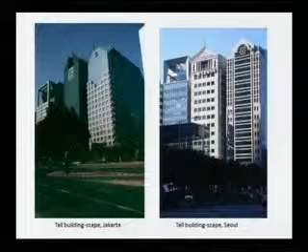It's the same. This is a cityscape in Jakarta, and another in Seoul—just two places I visited. It's the same rectilinear air-conditioned box isolated from culture, with a bit of fun and games at the top, and sometimes a bit of fun and games at the bottom. I mean, look at this—look at the slide of Seoul, the scheme in the middle there, with a postmodern, neoclassical pediment.

What the hell's that doing in the middle of South Korea? If it was in Rome, we could at least understand there's a cultural link—not a very deep one, but there's a link. But what is it doing there? Where is the cultural link with this? I'll tell you what the link is, and you're probably all aware: the link is Western equals modern, so let's emulate Western, let's import it—whether it's a car, a building, or whatever. I feel very strongly that we need to react against this.

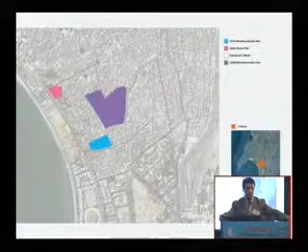You saw the maps from some of the presenters earlier today. The red is the C Ward. The purple is the 5 sites that we chose for the students last year. Interestingly, the blue is the site that we're doing this year, so I have 12 students in the room who are doing a similar project this year. And interestingly, the pink is the site for the India Tower, which I think a lot of you will know. So although this is not a high-rise context, as you've seen from Mayank and others, the plan is that this will be a high-rise context.

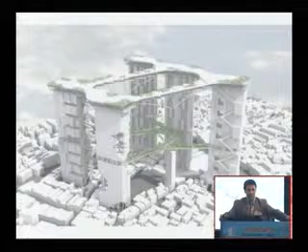Wow. That's what we created. Is it a monster? Perhaps. But I want to talk to you about the ideas behind this. I jumped to the final image so you know where we're going - let's not keep it in suspense. But it's really important that you understand the ideas here.

I mentioned yesterday, in fact, Charles Correa spoke about it - you know, for correct tall buildings, it's not about FSI, it's not about number of meters, it's about what makes sense in support facilities, amenities. I'm the Executive Director of the Council on Tall Buildings and Urban Habitat, and I live out in a single-family home in a place called Oak Park on the edge of Chicago, with a nice garden.

I have 2 children, 3 and 6 years old. I would not put them in a high-rise tower if you paid me. Because there is not the space and facilities in the majority of high-rise buildings to continue the pattern of life that we want - social space, communal space. This happens at the street, in the gardens, in the parks, in the road. It doesn't happen in elevators and corridors.

If we are serious about creating future, taller, denser cities, then we need to put all of the city up in the sky. And this is what this project looked to do.

So bear with me for a second while I talk about sky bridges - connections between buildings. It's been proposed for almost 200 years in science fiction, cinematography, and various other realms. Is it just a utopian vision? I know of at least 50 buildings around the world that have sky bridges, connections between buildings.

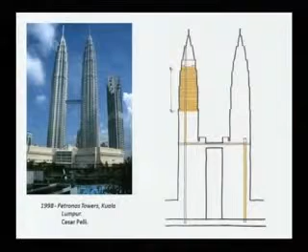There are lots of other benefits. You know the Petronas Towers? That sky bridge is part of the fire strategy, fire evacuation strategy. So people can actually evacuate through the sky bridge and evacuate through the safe tower in the event of a fire.

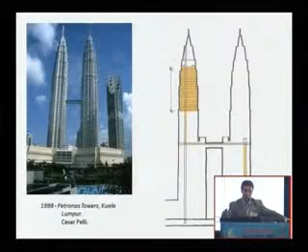That actually resulted in them being able to omit 1 fire stair from each of those towers - 1 fire stair, 3 meters by 6 meters, 18 square meters per floor, times 2 towers, times 44 stories, because it was half height. That's a lot of money, as well as floor saving.

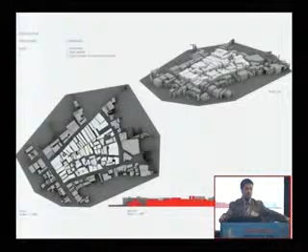Mayank just gave what I thought was an excellent presentation. I've spent a lot of time with Mayank in the past year, and he's an incredibly intelligent and sincere guy. I think we agree on most things, virtually 95%. Personally, I agree with everything they've said in the C Ward, with the exception of the final vision.

Because what concerns me is they're sweeping the city away. Where they see just problems in the C Ward, I see an area that I've never seen anywhere on this planet, fraught with problems, no question about it, but also full of opportunities. And go back to what I said before: it's been done around the world, sweep away the city and build something new. I think there is a way we can work with the existing fabric.

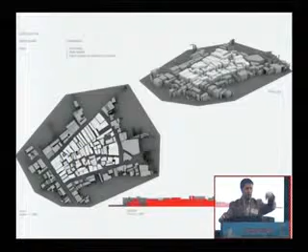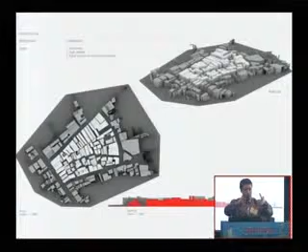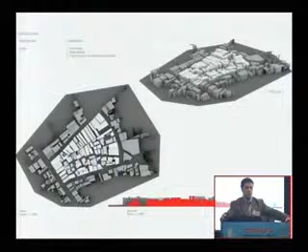Not just retain the religious structures and listed structures, but actually, if need be, look to recreate the urban grain that is there. Widen some of the roads, but the C Ward is the C Ward, and Mumbai is the C Ward because of the nature of the street and the buildings that front the street and the activities in those buildings. Personally, I don't think you should sweep all that away. So we did a number of generic studies to show how we could keep that and still develop a tall building and still put in some car parking. I'm not going to go through it in detail, but you can perhaps get an idea through some of these.

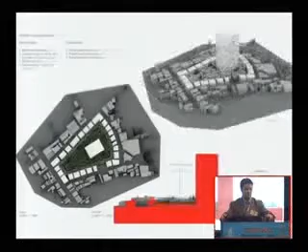Every scheme is retaining the perimeter of the site, or at least the concept of the perimeter of the site. Okay, so this is interesting.

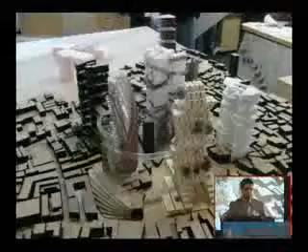So we did all this, we got back to Chicago, and then it was, right guys, you're all ready to design your tall building, get on with it. And look what they created. I think this epitomizes what's kind of wrong with architecture. Each student went out and designed their own high-rise icon and created a zoo, an architectural zoo, a menagerie, when even the brief required a vision together, and it did not have that vision.

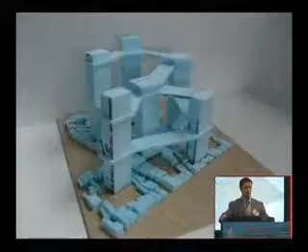So we stepped back from that. We started to develop a common architectural framework, started to explore how these buildings could relate to each other, and you can see a development here.

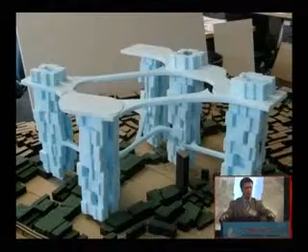Eventually to this, and this was an interesting breakthrough. In this scheme, we started to look at the relationship between the towers, at the base, at the urban grain, but also slipping past each other for views and wind and access to other things.

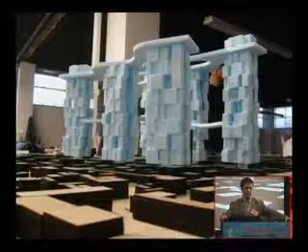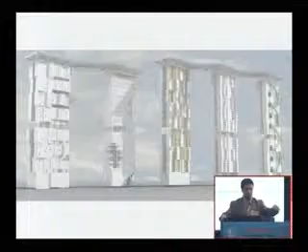This is the final model, but I want to talk a little bit about agenda. So there were 5 towers. Each of these 5 towers had an agenda. Most of them were sensible residential towers, but had these additional agendas.

This one was about food. The students researched how, as the city intensifies and gets bigger, we rely on ever more agricultural land to support our existence in cities. Not only that, but we import food, and the consequential food miles and energy involved from all around the world. They did a study which showed that a cabbage comes from Pune, 119 miles away, but an apple comes from the USA, 19,000 miles away. So there are energy implications and loss of agricultural land.

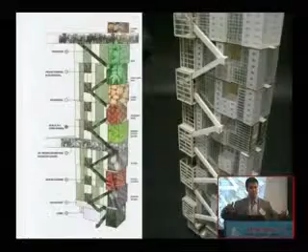So they looked at hydroponics - it's been done around the world. You don't want soil in tall buildings, so hydroponics means growing vegetables in the building. This became a sensible residential building, but the people who live there actually have access to a high-rise allotment, a place to grow vegetables, not only to sustain themselves but actually as a business to sell back to the city. That was one layer.

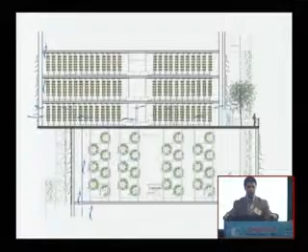You can see at the bottom end here, this was the vertical farm element, which was broken into horizons - fish farming, various other things up there. And in addition to that, we had these gardens, these communal spaces up in the air, and this public green elevator.

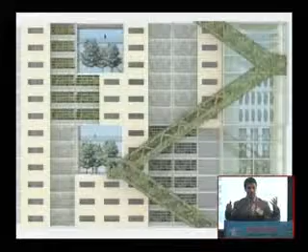You're going to hear Ken Yeang talk tomorrow about his work. A lot of Ken Yeang's work is about continual greenery, eco-corridors that have taken people up to this great park in the sky.

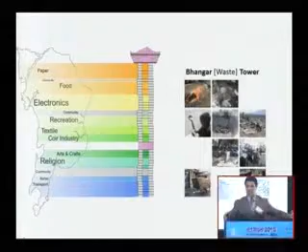Second scheme. Some of the students really engaged with the issue of waste in Mumbai, a major problem. Waste in a large part of the city is just thrown out of the window. However, there's a whole industry built up around it - we were in Dharavi slum the other day, and there's a whole section of Dharavi concentrated on recycling of materials. There is an industry that has grown up around it.

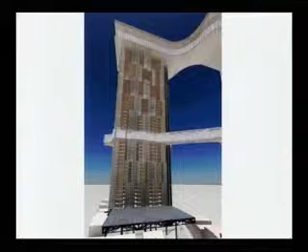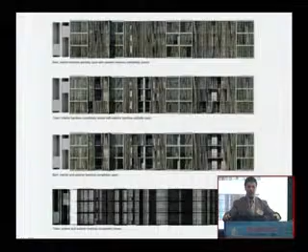So these students did lots of studies and looked to incorporate that waste into their building. In the same way that we had the vertical farm community for the residents, here we had a kind of recycling waste center within not only that building, but the whole complex that was created. Using some of those materials, the building actually had a skin of bamboo on the outside, sliding bamboo - recycled materials. I'm speeding up because I'm going to get the bell in a minute.

Education. If we're going to create cities in the sky, then all aspects of the city need to go up there - residential, office, hotel. I just described 99% of tall buildings. Why is that? That's not a true vibrant city.

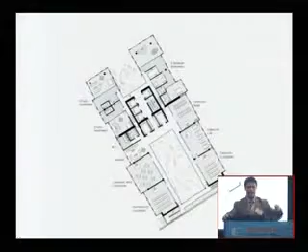So this tower was a residential tower and also a school, addressing the lack of school facilities in the city. To the north you can see the residential part, and then the school based around this 3-4-story atrium, with a basketball court.

Water tower, which looked not only at water as a valuable resource, but also the Indian culture of bathing and the importance of water in the psyche of the nation.

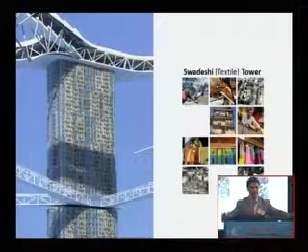I'm speeding up because I want to show you this last one, which was my favorite, the Swadeshi Tower. These students went and spent time in the Dhobi Ghats. For people overseas, the Dhobi Ghats are huge areas where something like 90% of the clothes and fabric in Mumbai is laundered through these communal clothes areas. Well, do we knock all this down? If we do, everybody just gets a washing machine and everybody's happy. But is that the right way for India?

So these students looked to create this in the sky. A ringing bell - whose idea was that? And also very Asian - you go to Hong Kong and sometimes you think the towers are made of clothes because everyone's drying their clothes outside there. Is that such a bad thing? No.

This was a fantastic scheme, really, which looked to embrace that, not only for the inhabitants, but as a business. Charles Correa said, or somebody said yesterday, you put someone on the second floor of a high-rise building, you kill them. If they have a little business at the ground floor, and you put them on the second floor, not the 82nd, you kill them. So how can we get the business and everything else up in the sky? That's what that scheme was doing.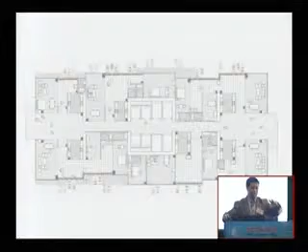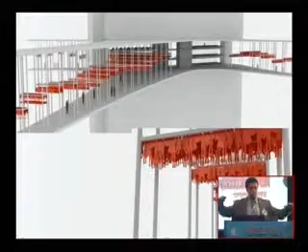There was lots of other great things going on which I haven't got time to tell you about - some of the spaces we created, the residential planning, all naturally ventilated, the communal Dhobi Ghats which spread out along the Skybridge routes. And then the Skybridges themselves work with this idea of yatra, of procession in India. These students studied all the different festivals.

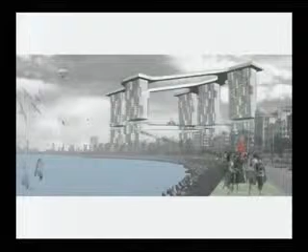I'm almost finished - so this was what we created in the end, and then this fantastic park in the sky. Some of you will be aware that a scheme very similar to this is almost complete in Singapore now, by Moshe Safdie Architects with Aedas as executive architects - 3 towers linked with a huge sky park. So to everyone sat in the audience thinking I'm crazy, we're crazy, and this is far too utopian a vision - it's not. It's really not.

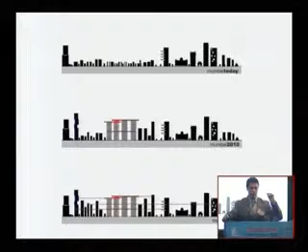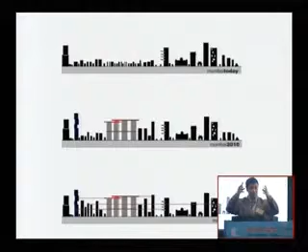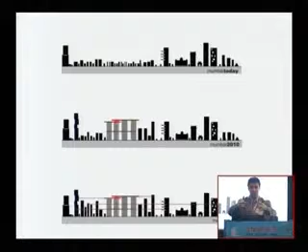But it requires vision. Please do not be under any misapprehension - we created a cluster, we've heard that word used today, cluster. I think we really did create a cluster. But even that in itself is not meant to be an isolated cluster. It's the start of something in the city, and that bottom diagram shows that. It's the start, but even in itself it would be a dead end if it was just 5 towers. It's meant to be a kind of duplication and intensification of the city at the higher levels.

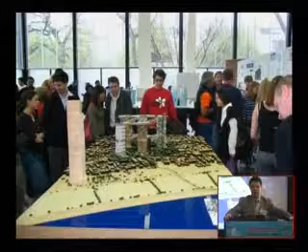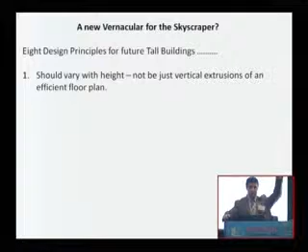I want to finish with what I tell my students when they're designing projects - 8 design principles for future tall buildings, and this is what I passionately believe in. I believe that tall buildings need to vary with height. They shouldn't just be vertical extrusions of an efficient floor plan, the commercial model - they need to vary with height. The Burj Dubai is 10 degrees cooler at the top than the bottom. Tall buildings are designed at the ground floor, but every horizon of the city is completely different. Varying texture and scale is essential.

I almost feel that a tall building should be designed as several small buildings placed on top of each other, with harmony, not just as a single piece of sculpture. New functions - office, residential, hotel, not enough. Bring the city into the buildings. Communal, open, recreational space - vital. I think it's completely ridiculous that we're still building all glass towers, especially in the desert, but also in lots of other places.

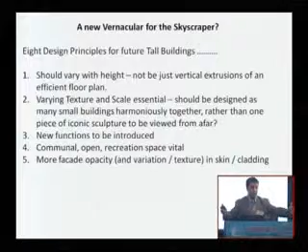And then going to gymnastics to actually control the sun with stuff on the outside, to solve the problem that we created in the first place. Glass is vital, but we don't have to build it all out of glass. Organic material and vegetation needs to come into the material, into the palette. More connections - and the sky bridges are as much about a philosophical connection as a physical one, because it'll start to break down architectural ego when architects need to work together with a 3D urban vision. All aspects of the city need to come up into the sky. Thank you.